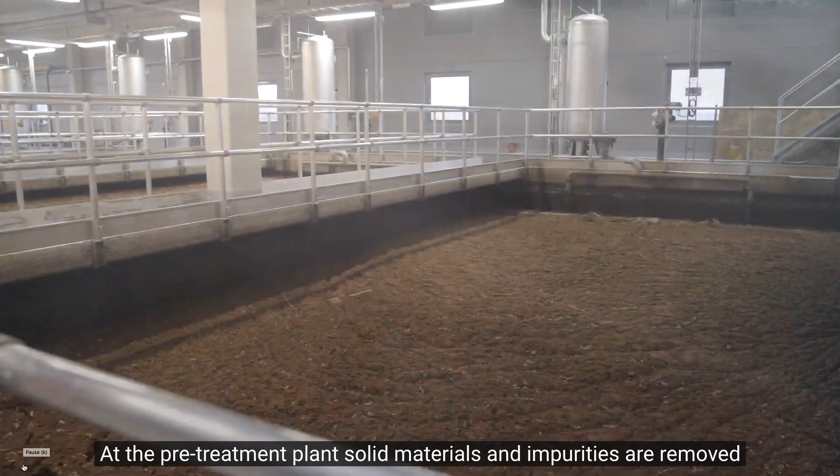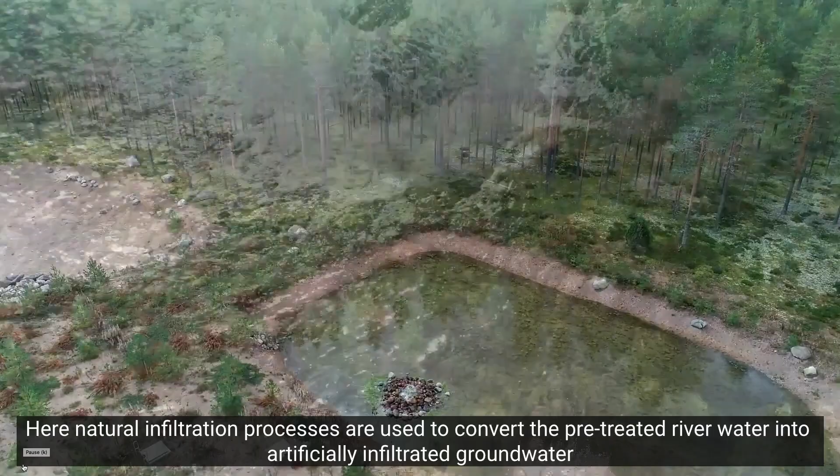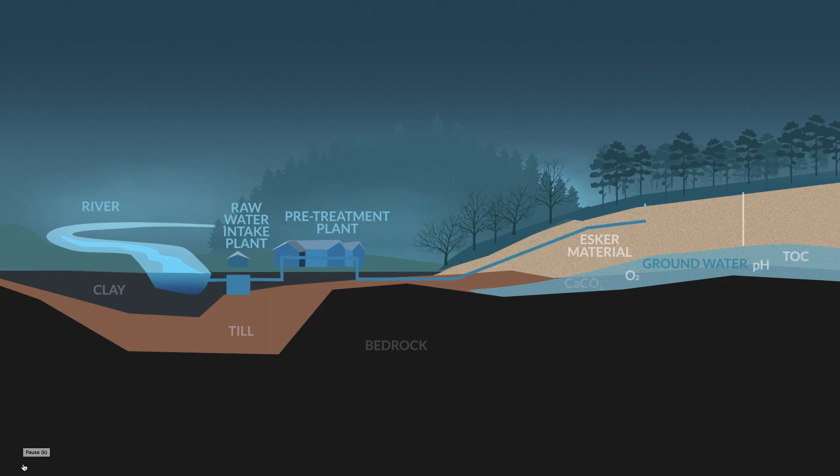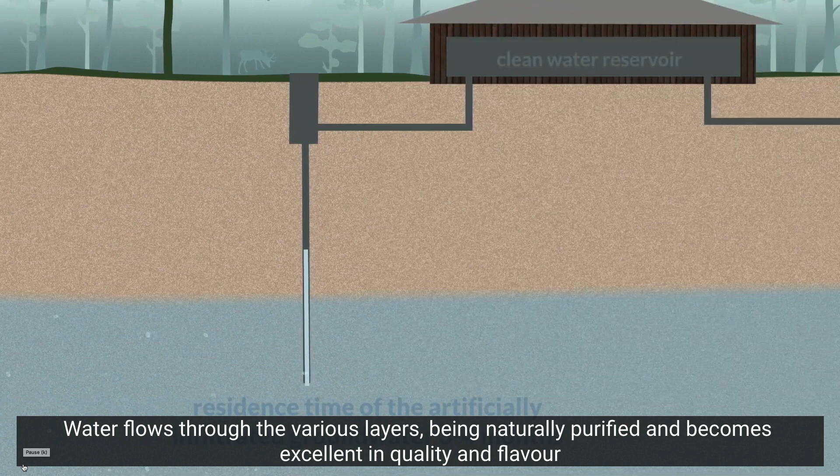Raw water is taken from the river, almost 100 kilometers from Turku. At the pre-treatment plant, solid materials and impurities are removed before the water is pumped to a sand and gravel esker area. Here, natural infiltration processes are used to convert the pre-treated river water into artificially infiltrated groundwater. The formation of new groundwater takes place deep within the esker aquifer over a period of 3 to 4 months. Water flows through the various layers, being naturally purified, and becomes excellent in quality and flavor.

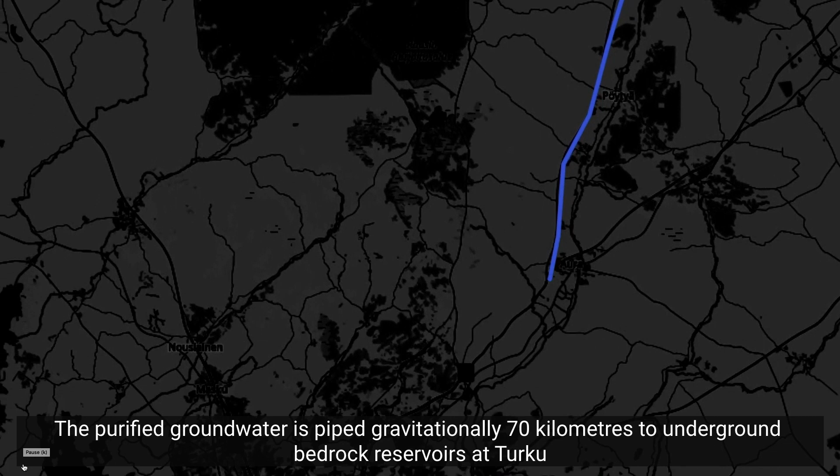The purified groundwater is piped gravitationally 70 kilometers to underground bedrock reservoirs at Turku. The production of artificially infiltrated groundwater under such precise production control is an innovative and unique process that can also easily be applied in other parts of the world. The water's quality is analyzed before it is delivered to the distribution network to all consumers for everyday use.

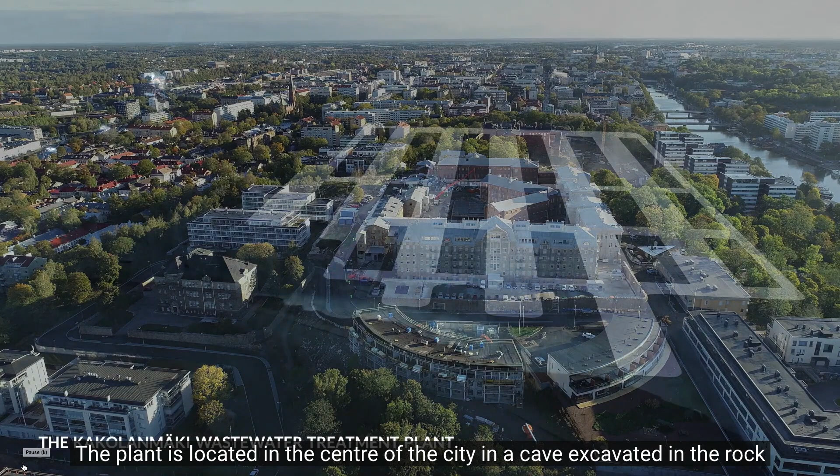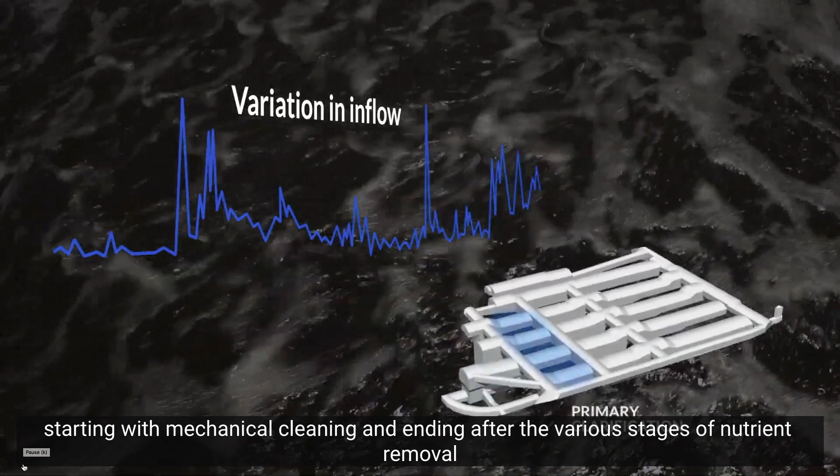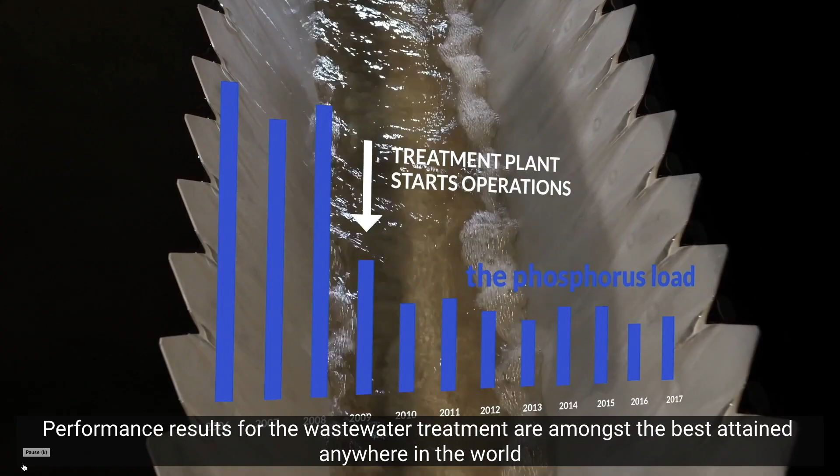Wastewater from the 14 municipalities in the Turku region is transferred for treatment at the Kakolanmäki wastewater treatment plant. The plant is located in the center of the city in a cave excavated in the rock. The treatment process takes place underground in stable conditions, starting with mechanical cleaning and ending after the various stages of nutrient removal. Performance results for the wastewater treatment are amongst the best attained anywhere in the world. The efficiency and functionality of the wastewater treatment is monitored around the clock.

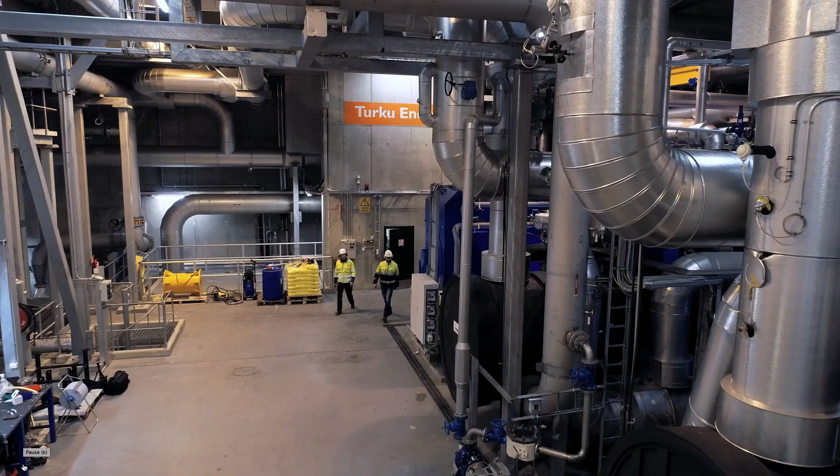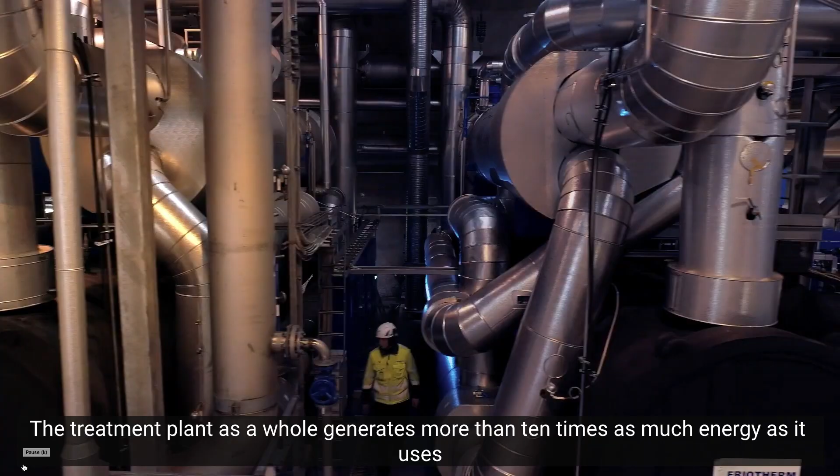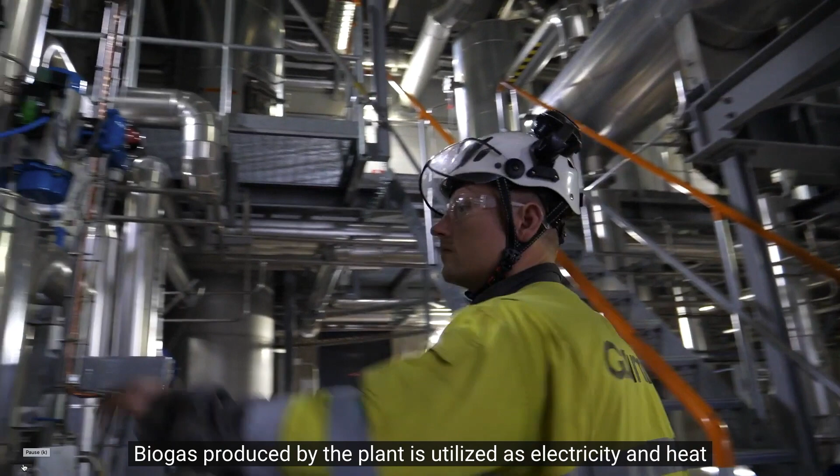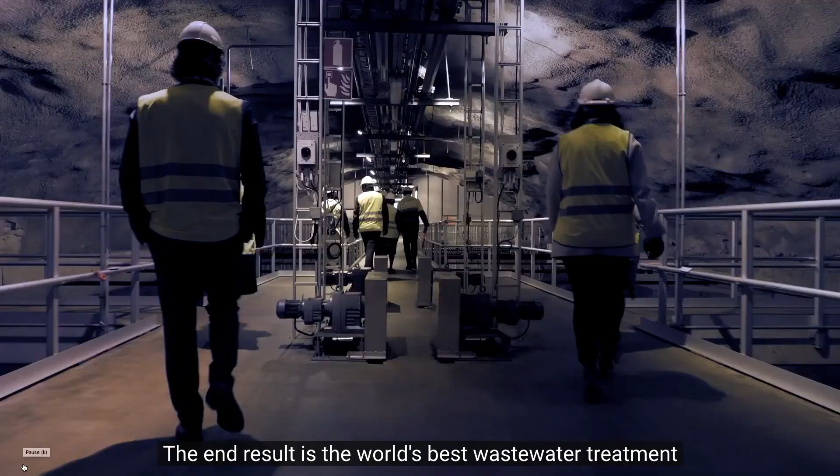Heat recovery from purified wastewater by means of heat pumps is an internationally significant innovation. The treatment plant as a whole generates more than 10 times as much energy as it uses. Sludge produced as a result of wastewater treatment is processed at the biogas plant in Turku. Biogas produced by the plant is utilized as electricity and heat. Biogas is also refined as transport fuel. The treatment plant's operations are based on excellent technical and economic know-how. The end result is the world's best wastewater treatment. This knowledge can be utilized all over the world.

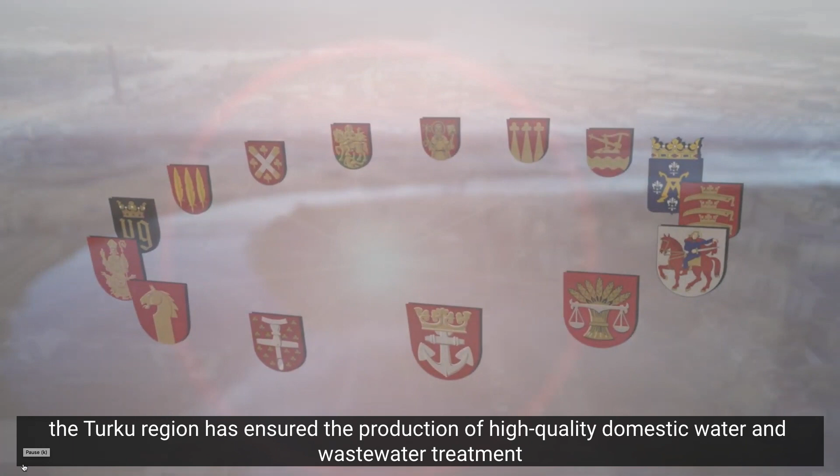Through regional cooperation and the efforts of expert staff, the Turku region has ensured the production of high-quality domestic water and wastewater treatment. This achievement means that trustworthy water supply services that strengthen sustainable development are evenly available to all residents, as well as industry and commerce in the region. Our water production and treatment systems are safe, high quality, cost effective, and environmentally friendly. We are keen to share with you the world-class expertise that our achievements reflect.

Yeah, as it was told in the small video, Turku Region Water Ltd. is responsible for the fresh water in the whole region, more than 300,000 inhabitants, and the daily production capacity is up to 65,000 cubic meters. And the water is pumped from the river, which is quite a big river, the Kokemäenjoki river system, 100 kilometers north from Turku. And it's enough water for the region.

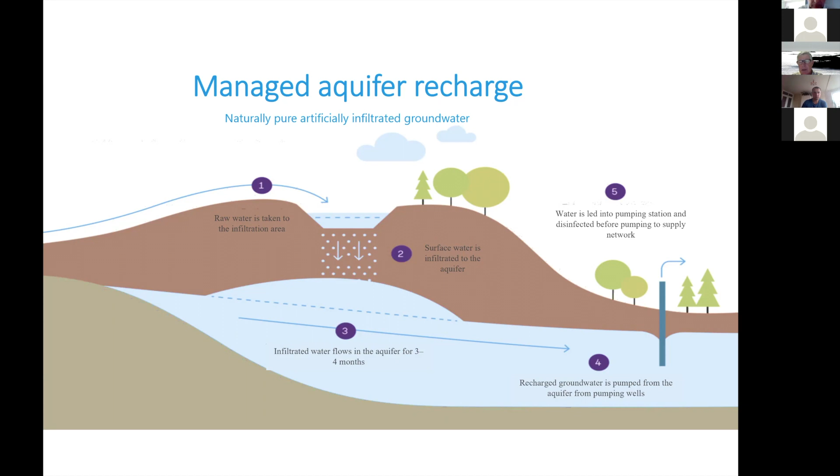And this method is quite natural. It's like creating natural groundwater, but of course it's controlled. We can control the amount of water which we are pumping inside of the esker and how much we are pumping out. And only a small amount of chemicals are used in this pre-treatment process near the river Kokemäenjoki. And after that, it's all a natural purification system.

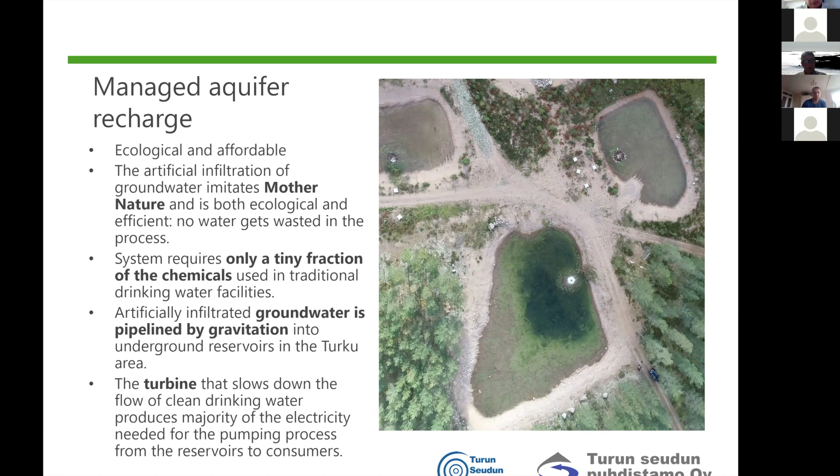And then this artificially infiltrated groundwater is pipelined by gravitation to Turku, and it's quite high in level, 125 meters above sea level, and in Turku it's about 7 meters, and that means that there is lots of power, and there is a turbine that slows down the flow, and that power is used to produce electricity, which is needed for the pumping process from the reservoirs to consumers.

There are lots of sustainable development goals which we can achieve using that system. It's very safe because if there are some problems in the rivers, like floods and some chemical problems, we can stop the pumping from the river and wait until the problem is over, and still there is lots of water available in the esker area.

It's also a very cost-efficient technology to produce large-scale water for the region, and it can be easily automated, and that's why not much manpower is needed to operate the process. It's a sustainable way of managing water resources. It's adapting to climate change, and it's also possible to increase the amount of water if the population is growing.

And as I told, it's very safe in that we have lots of groundwater down in the esker areas, which we can use for a couple of months without putting more water in that esker.

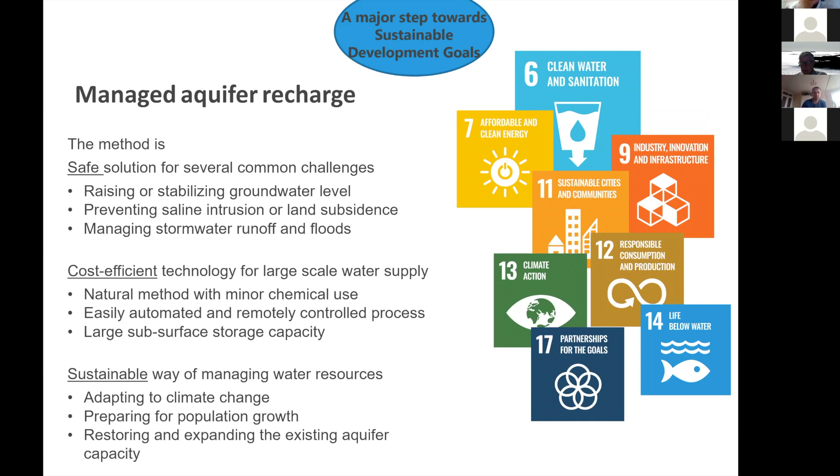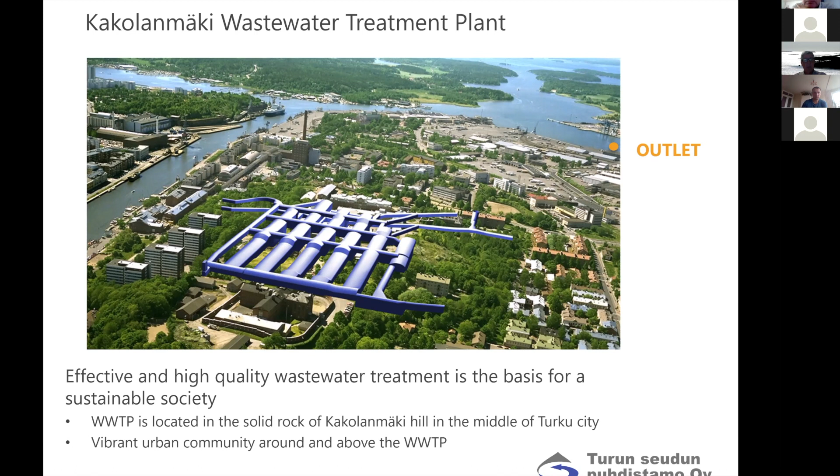In Finland, the environmental permits are quite tough, and as you can see, it's very high quality results which we can achieve. And phosphorus especially is important for us because the archipelago sea, the Baltic Sea, is very shallow and very sensitive to eutrophication. And that's why we are very happy that we can reach a very low amount of phosphorus in the wastewaters, and nearly 99% of the phosphorus is removed from the waters. The other parameters are also working very well.

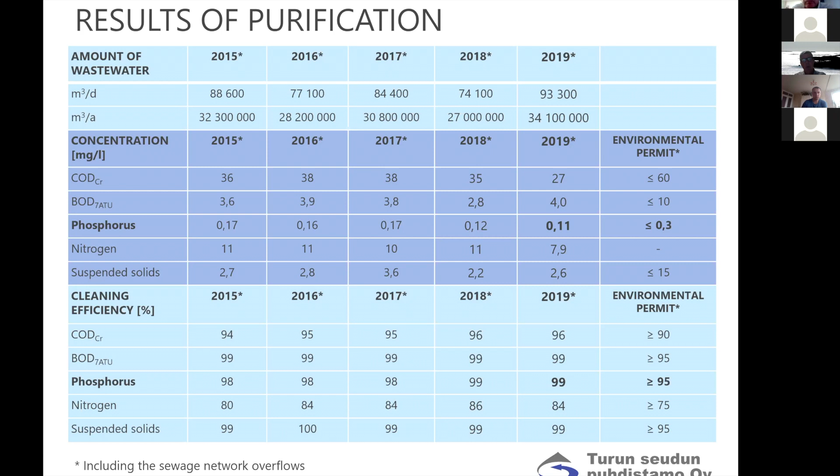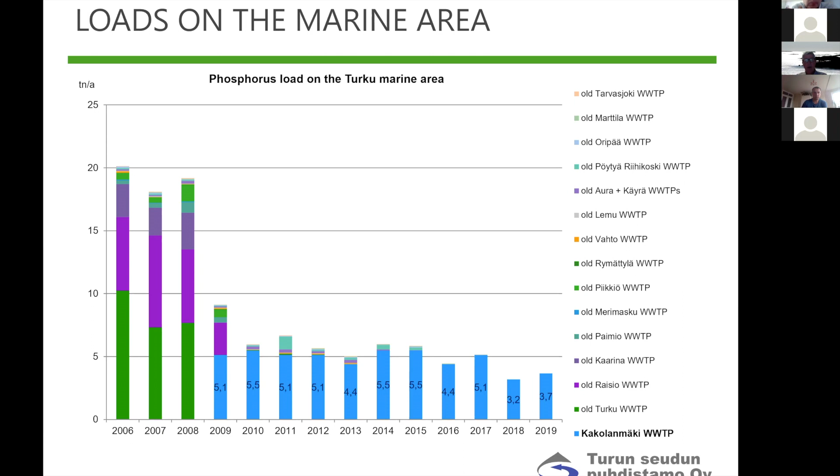But it was not the situation before this new Kakolanmäki wastewater treatment plant, which started in 2009. There were lots of small wastewater treatment plants, and the phosphorus load was nearly 20 tons per year, compared to recent years, which is under 4 tons, and that has caused very positive movement for our sea area near Turku. And as you can see, the phosphorus load has decreased more than 80% from the old times.

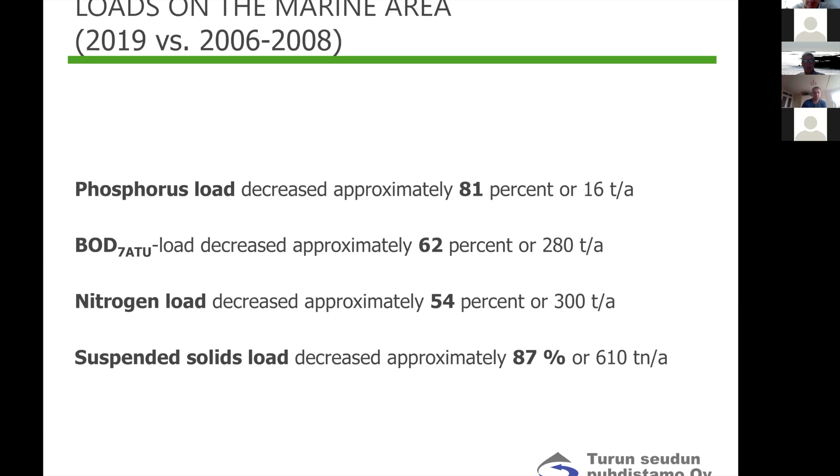The amount of wastewater is quite high because of stormwaters, which are about 40% normally, and that's why one of the biggest problems is that it's very costly to remove matter in these stormwaters, and in the future one of the main problems in our case is to reduce this amount of stormwater.

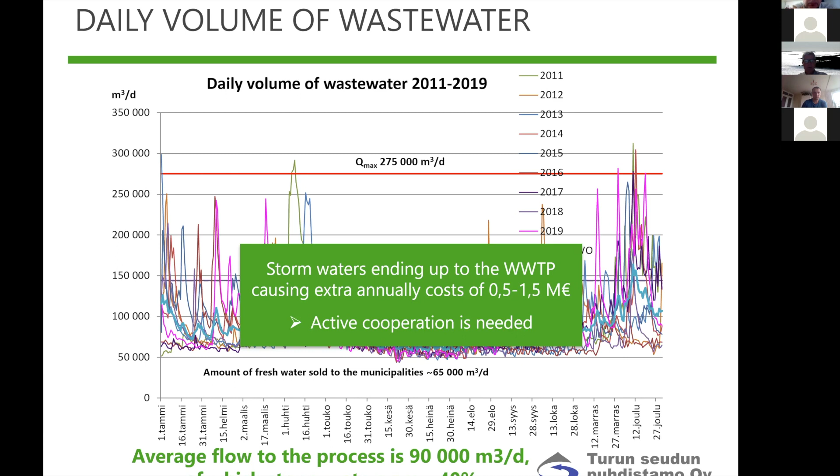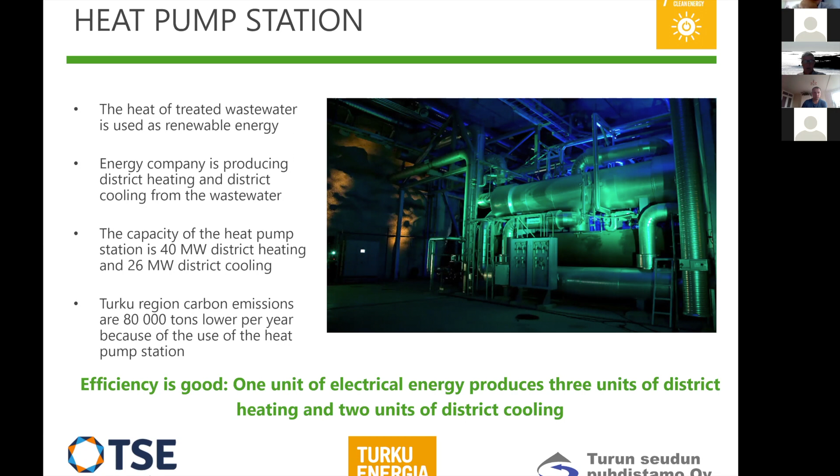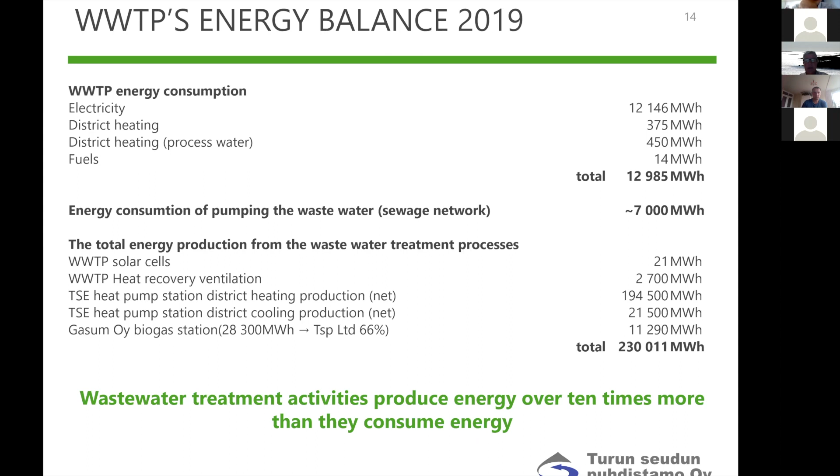The heat pump inside of Kakolanmäki: the principle is that our local energy company is producing district heat and district cooling from the wastewater. It's quite an effective system, and if we count the carbon emissions on a yearly basis, we can reduce 80 000 tons per year using these heat exchangers. And the energy balance is in principle such that the whole system produces 10 times more energy than it uses on a yearly basis.

Then sludge treatment. Sludge is transported to the biogas station, and nowadays they clean it for the production of traffic biogas, and then the nutrients, especially the phosphorus, are also recycled for utilization.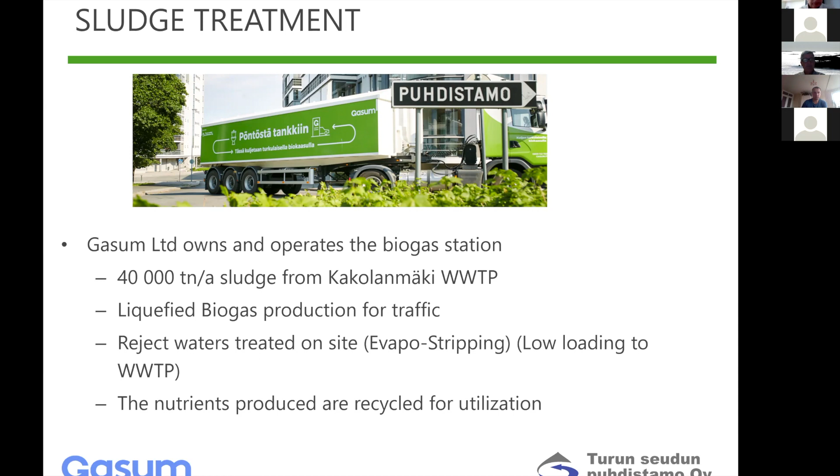The summary is that the water production and wastewater treatment operations in our case are excellent, with optimized models, and this knowledge we are ready, of course, to give to other municipalities and other actors, and nowadays there are thousands of visitors yearly who want to see how it works in the Turku region. And in our mind, it's a great example of the functionality of the circular economy.

And in the Turku region, there's no need to buy bottled water anymore, because the water in the tap is normally much better quality than bottled water.